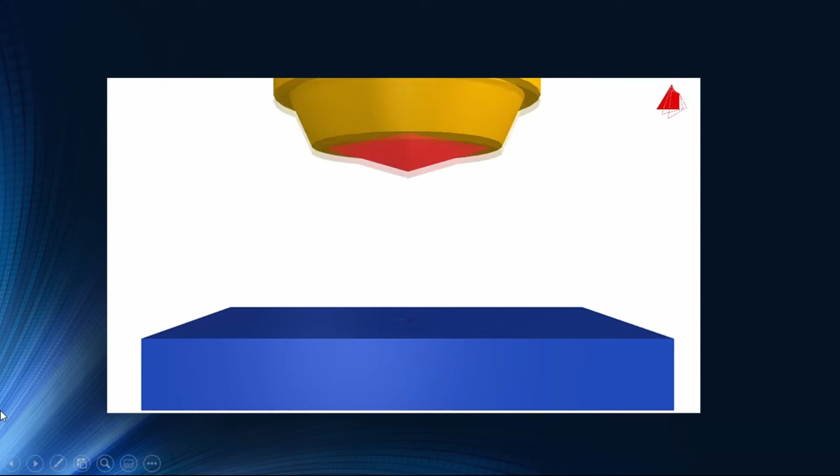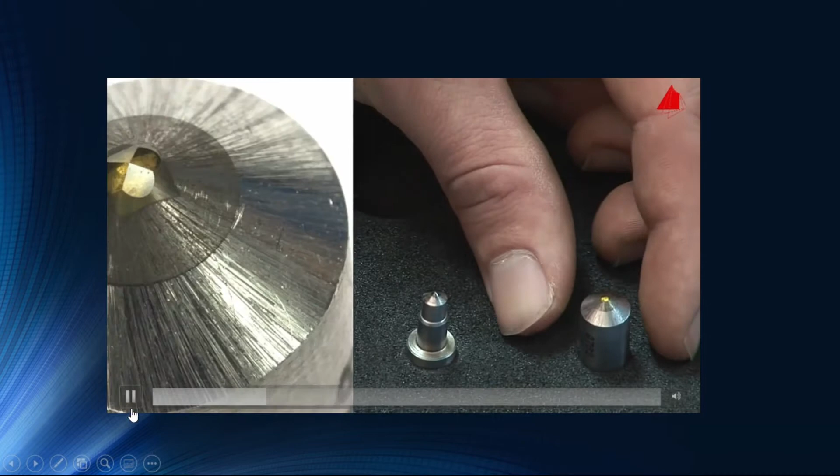O princípio é exatamente o mesmo, só mudando a forma do penetrador. First, the tester has to prepare his testing machine. He takes the Vickers indenter with the four-sided pyramid - então vai pegar o indentador e colocar na máquina - e insere no dispositivo de montagem da máquina de ensaio.

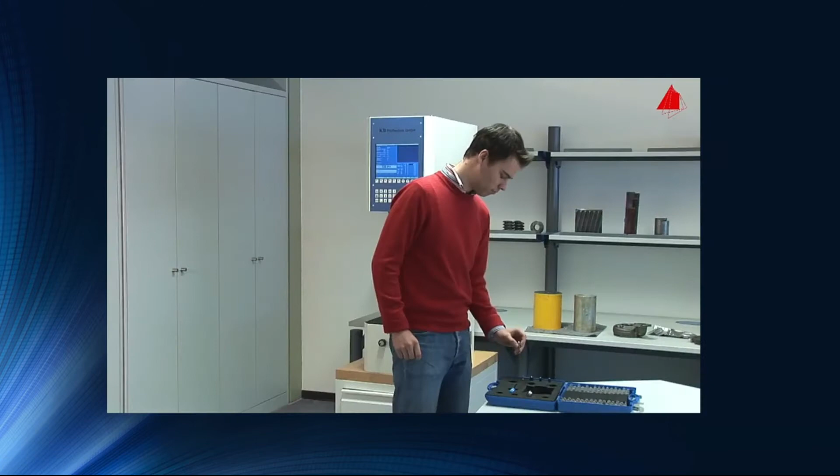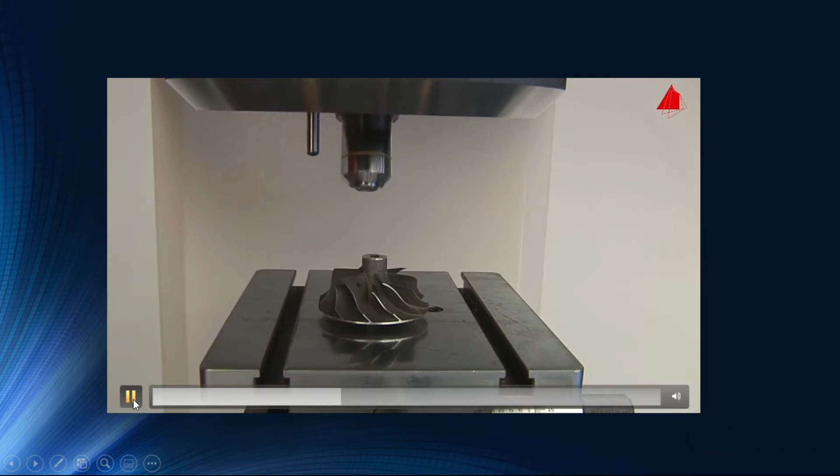He then places the compressor wheel on the support table and rotates the microscope lens into its working position. Da mesma forma, ajustando o foco do microscópio. With a hand wheel, he adjusts the height of the support table until the test piece surface is displayed in focus on the screen. Next, he moves the test piece around on the support table until the right spot for the hardness test is displayed.

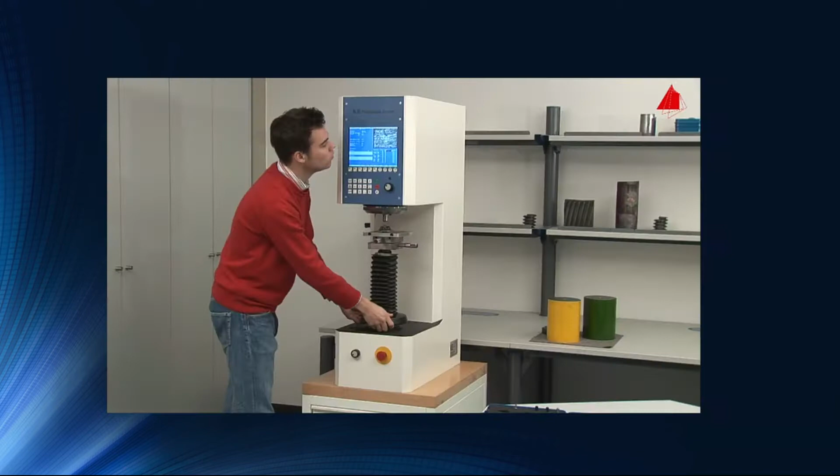Now that everything has been prepared, let's begin with the test. After pushing the start button, the diamond pyramid pans down and carefully touches the test piece surface. The test force slowly increases to its specified value. Então a aplicação da força começa digamos do zero e vai até o valor máximo setado no teste, e aí tem a marcação ou a impressão na peça.

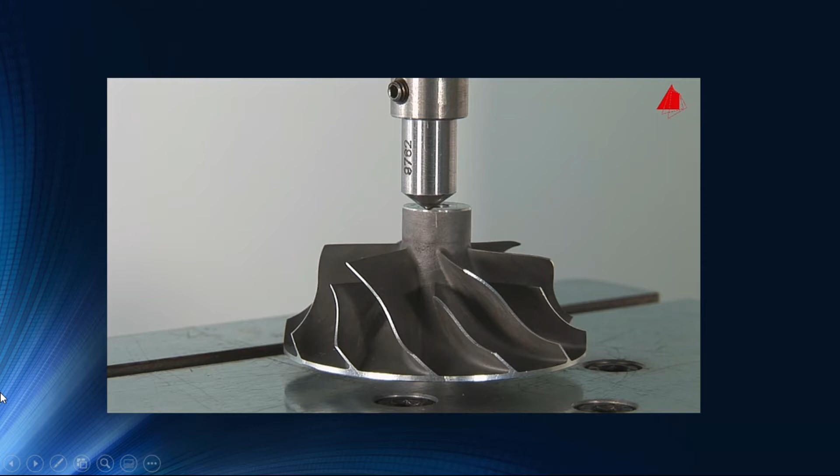After holding the test force constant for a certain time, the indenter lifts again, pans back, and the microscope lens resumes its former position. This is the magnified indentation on the display screen. A indentação está marcada, aí vamos ir com essas linhas retas vermelhas e azuis e definir os valores das diagonais.

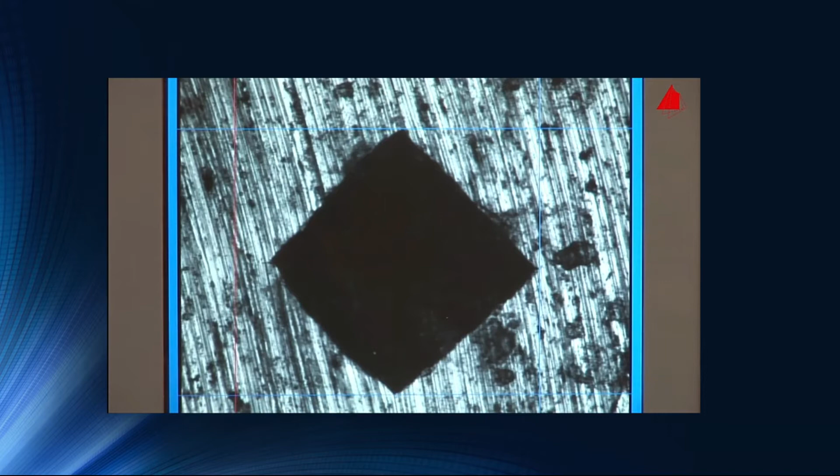With the control knob, the tester now places 4 measuring lines at the corners of the indentation. Doing that, he can easily measure the length of the 2 diagonals. Feito isso, a fórmula já está colocada dentro do equipamento, então aperta-se um botão e tem-se o valor da dureza - he only has to push the input key.

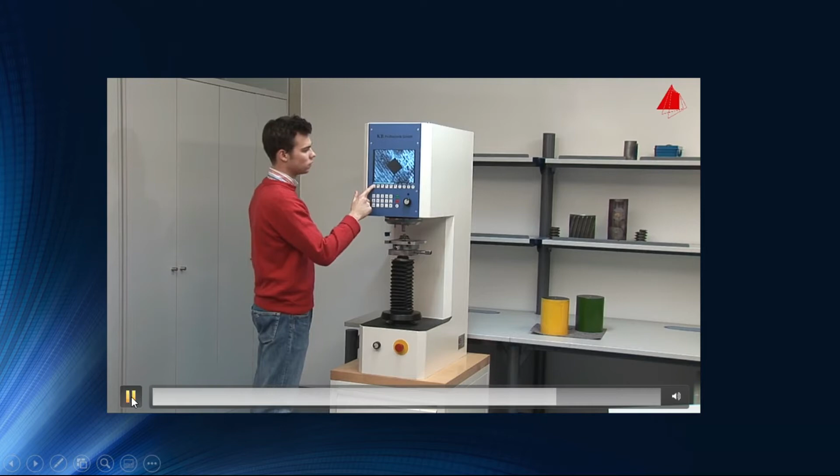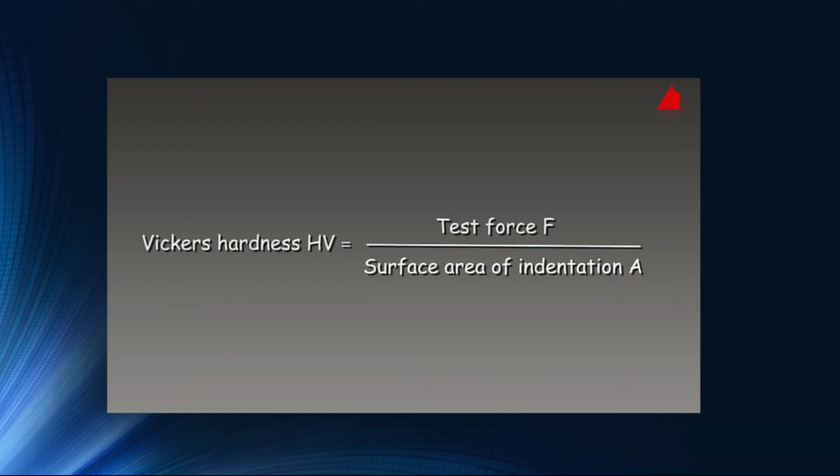The Vickers hardness value will then be calculated automatically. It is equal to the test force F in the old unit kilopond divided by the area of the indentation A in square millimeters. The Vickers hardness of our compressor wheel is displayed on the bottom left-hand corner of the screen. In this case, it amounts to 125 HV.

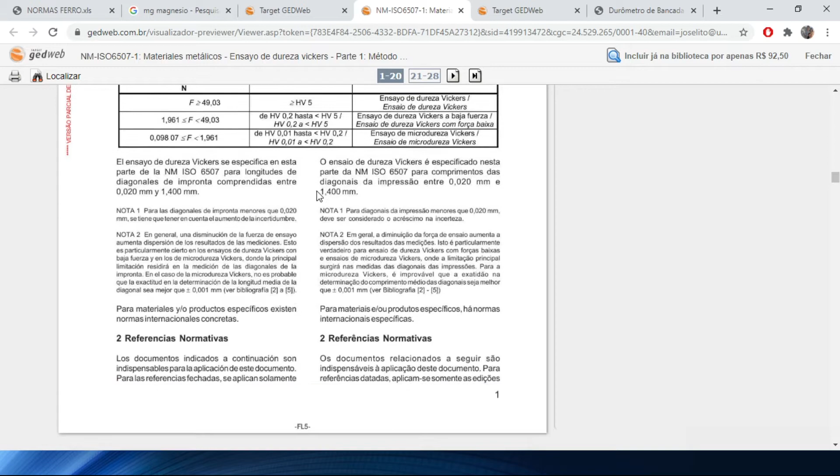Da mesma forma que para o ensaio Brinell, nós temos para a dureza Vickers a norma relacionando ou dizendo qual é o procedimento do ensaio. Então tem o escopo, referências normativas, símbolos, termos e aí vai. Fala da máquina de ensaio, como deve ser o método, as forças a serem utilizadas, os símbolos utilizados, o princípio, a aplicação da força, esse ângulo aqui que é de 136 graus, a definição das diagonais, as contas que são feitas e como deve ser colocado o valor.

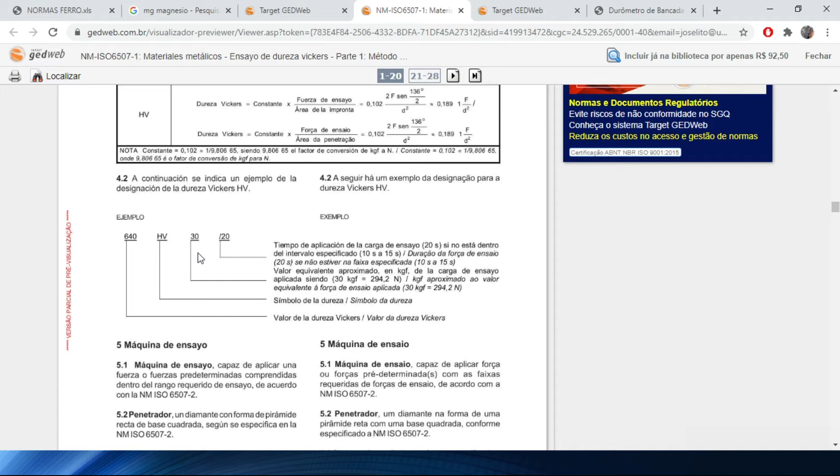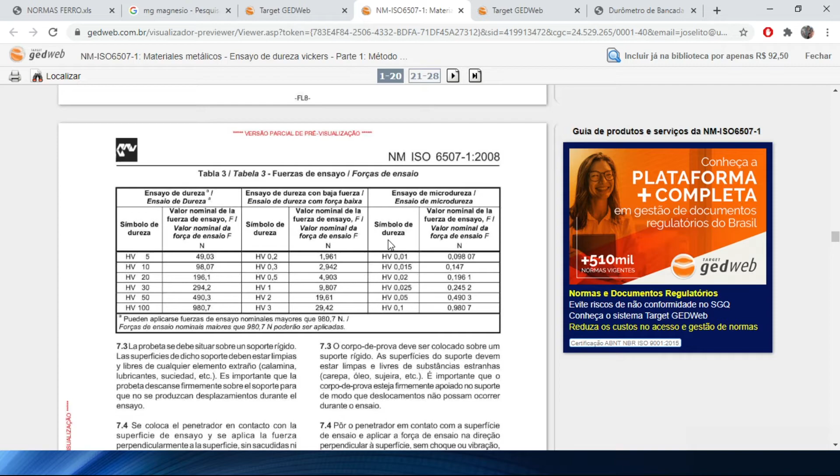Então aqui 640 HV 30/20. Então 640 é o valor, HV dureza Vickers, 30 a carga máxima que está sendo utilizada e o barra o tempo em segundos. E aí tem todas as normativas. Então, nós temos aqui as escalas HV5, HV10, HV20, HV30, HV50, HV100, e aqui os valores que são colocados para cada um desses. E lá para o final vem a questão da incerteza dos resultados, aí fala um pouquinho da estatística e das correções que devem ser feitas, principalmente quando se trabalha com peças com espessuras muito pequenas.

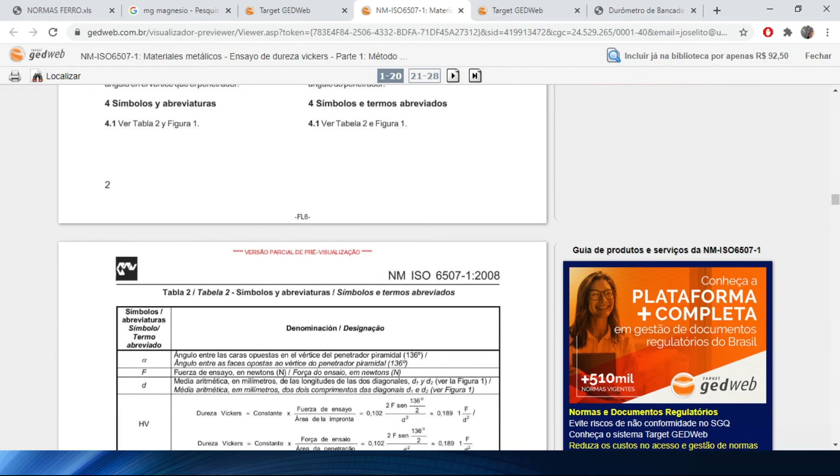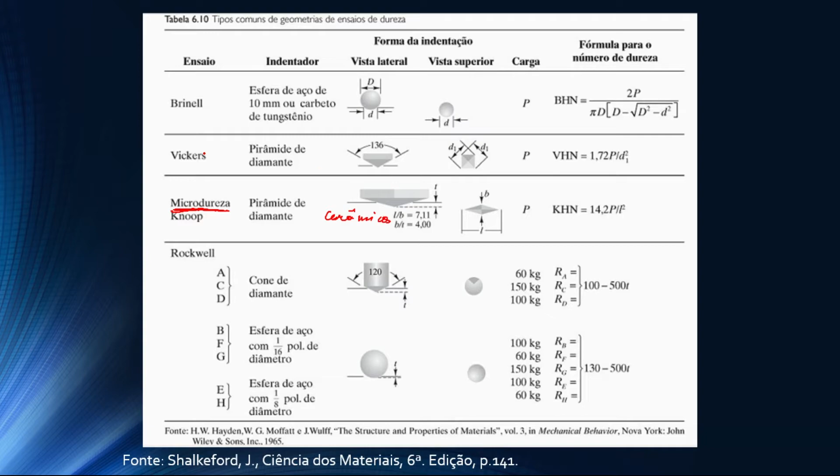A dureza Knoop, ela é similar a Vickers, só que é microdureza, é muito mais aplicado a elementos de pequena espessura e que tem uma fragilidade relativamente grande, por exemplo, como os materiais cerâmicos. Mas o princípio é exatamente o mesmo da dureza Vickers.

Falando agora da dureza Rockwell. A dureza Rockwell, ela é, digamos, um tanto quanto mais simples de utilização, pelo fato de que a medida da dureza é feita diretamente em uma escala. Então, tem-se o equipamento chamado de durômetro, e desse durômetro nós vamos ter escalas A, B, C, D, E, F, G, H e K. E cada uma dessas escalas vamos ter um indentador, ou seja, um penetrador, que é feito de um tipo de material.

Além disso, ainda temos as escalas 15N, 30N, 45N, 15T, 30T, 45T, 15W, 30W, 45W, que vai depender do tipo de penetrador e da força que está sendo aplicada. Então, do ponto de vista de utilização na indústria metalmecânica, a Rockwell tem uma facilidade bem maior porque um único equipamento já dá o resultado.

E qual é a vantagem da Rockwell em relação à Brinell? Na Rockwell não se precisa de um equipamento adicional, então basicamente a medida vai ser pela profundidade que o indentador penetra na peça. Então, se ele penetra muito, uma dureza pequena. Se penetra pouco, uma dureza alta, tudo isso vendo em uma escala.

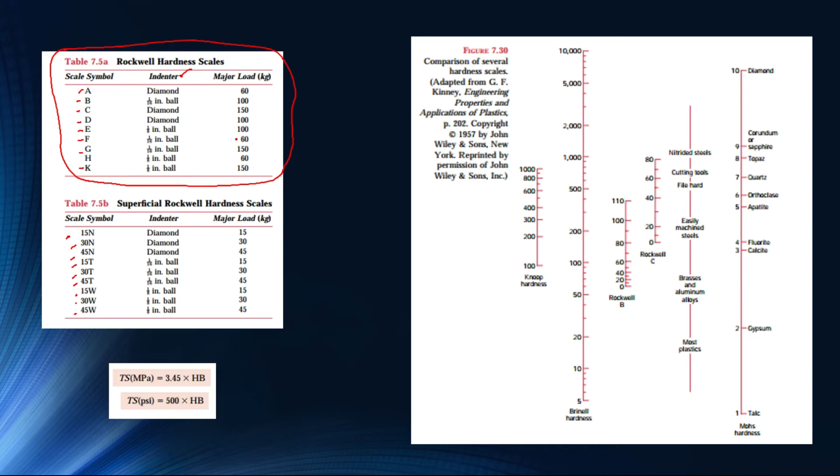Vamos utilizar de novo o mesmo canal para falar sobre a dureza Rockwell. No caso aqui, utilizando a escala C.

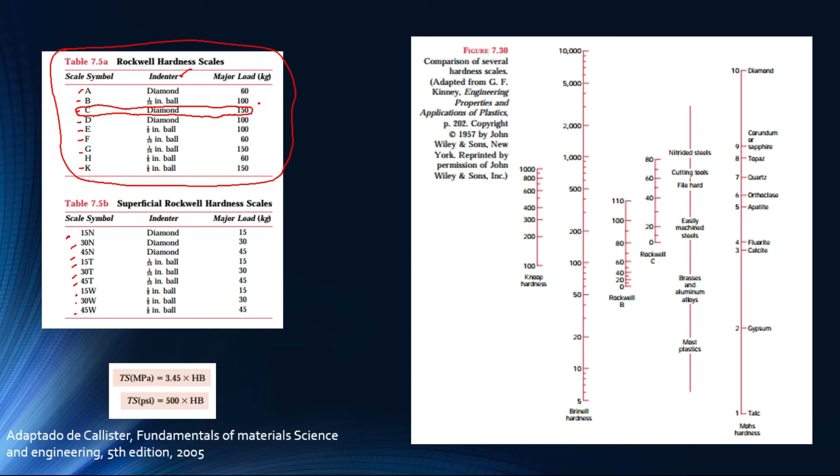Rockwell é com um penetrador, é essa daqui. Um penetrador de diamante e uma carga de 150 kg.

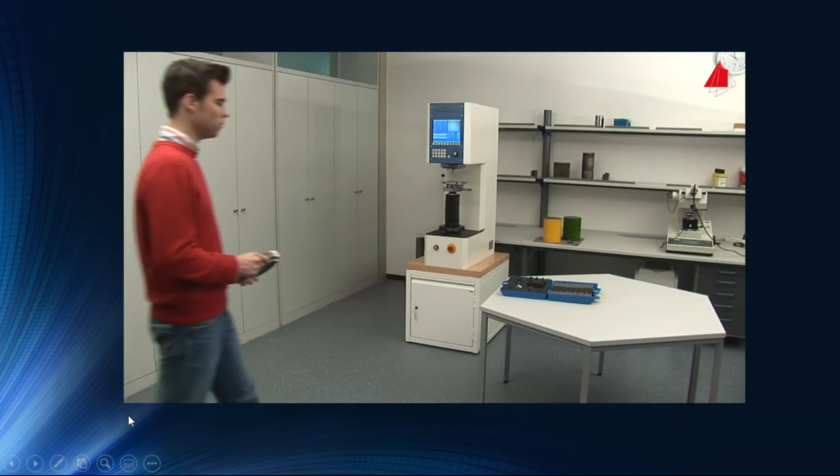The Rockwell Hardness Test, Scale C. In this video, we will show how the Rockwell Hardness Test works using a gear wheel. The basic idea of this test method is to measure the permanent depth of indentation of a hard indenter under a test force. In the process variant Scale C, a rounded...

Então, o penetrador, a peça que está sendo ensaiada, e a gente vai ver aí a diferença que tem do quanto penetra na peça. Cone made of diamond is used as an indenter.

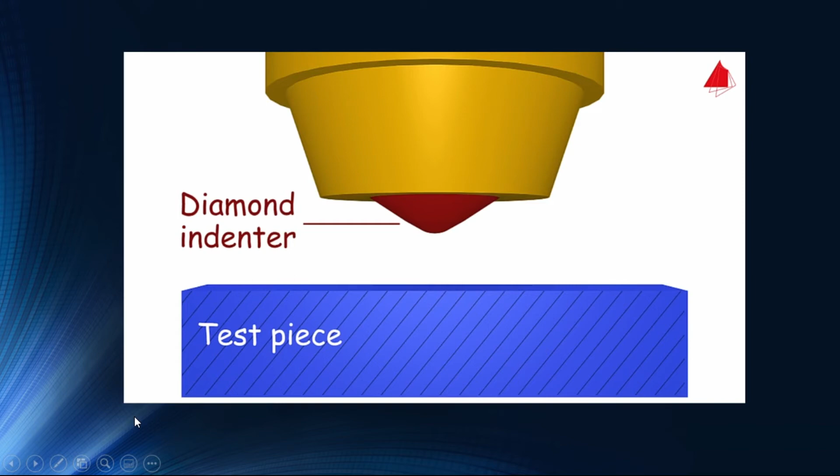In step 1, the diamond cone is pressed onto the test piece surface with a minor force of 10 kiloponds. The depth of indentation under this preliminary load is the reference point.

In step 2, the test force is increased by 140 kiloponds, which is acting as the major force. Depois, acrescenta-se mais uma carga àquela primeira carga que já estava sendo aplicada. This means that an overall force of 150 kiloponds is now acting on the indenter, and this force is held for a certain time.

Deixa durante um certo tempo. In step 3, the major force is removed again. While the minor force is still acting, the permanent... Remove-se a segunda força e vai ali para o ponto 3.

An increase in depth of indentation E is measured. Então, essa diferença entre a aplicação da primeira força e depois da retirada da segunda força, tem-se o que a gente vai medir como sendo dureza.

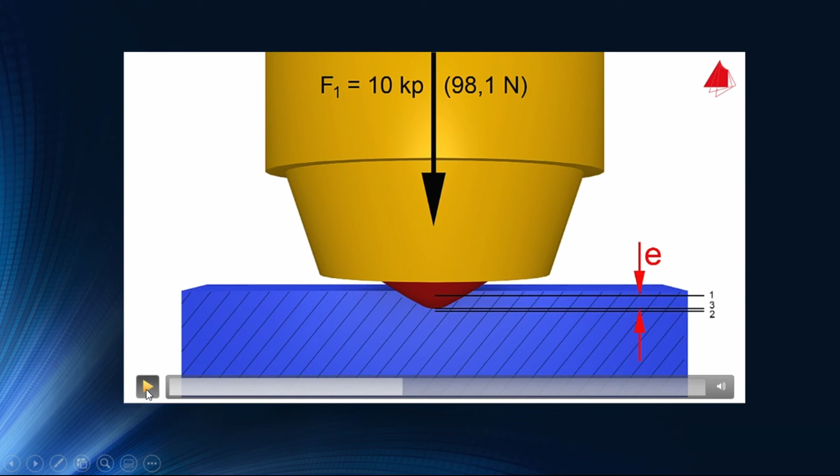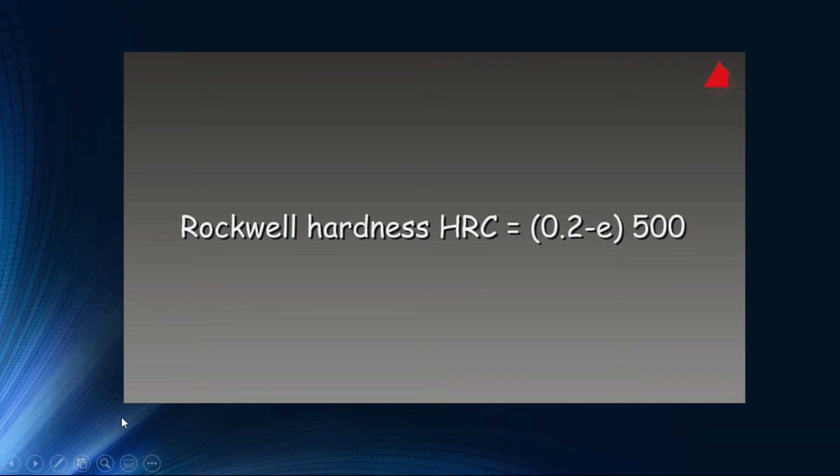This is how the Rockwell hardness is calculated. Rockwell hardness HRC is equal to 0.2 minus permanent depth of indentation E in millimeters, times 500.

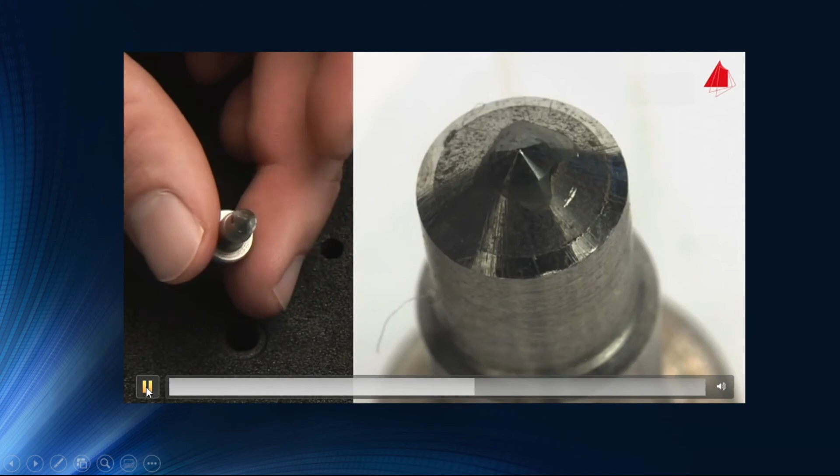Let's take a look at how the test is carried out in practice. The tester selects the conical diamond indenter and installs it in the testing machine. Then he picks up the gear wheel and puts it on the support table.

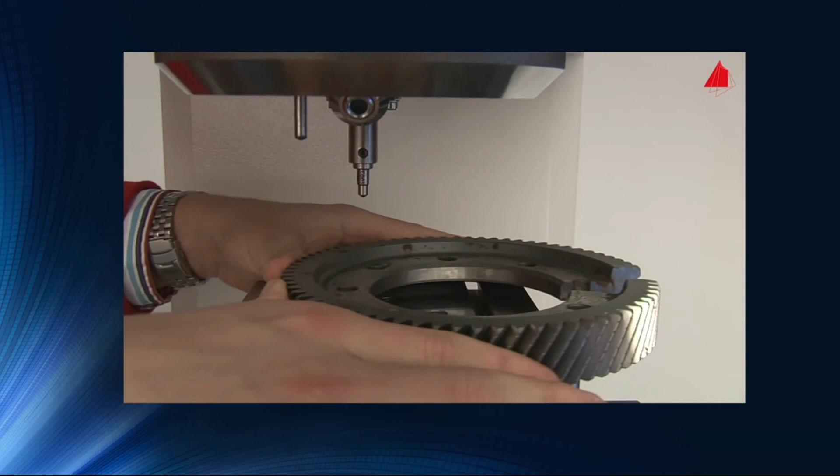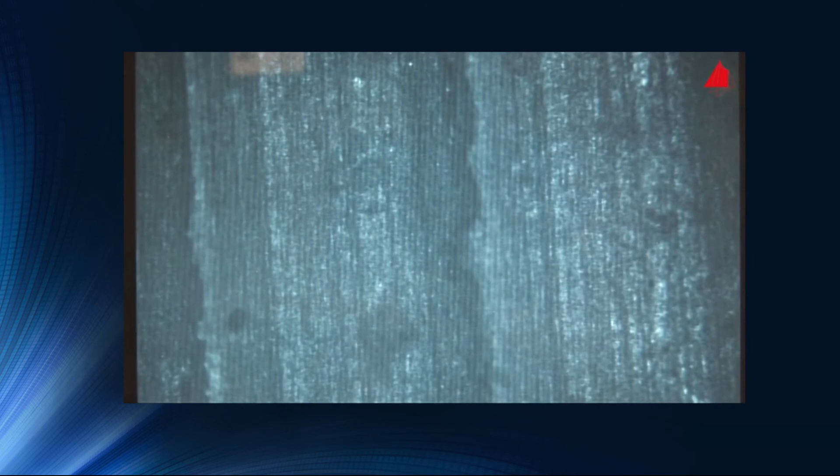In modern testing machines, the Rockwell hardness test is fully automated. That's why the Rockwell hardness test is used so often in automated production lines.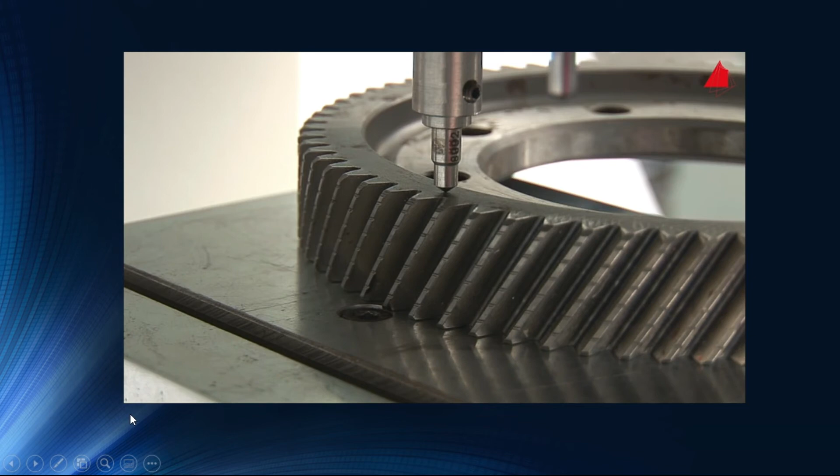That's it. Então, fez todo o ensaio e já saiu o resultado. The Rockwell hardness of our gear wheel is 55 HRC. This result is displayed on the screen.

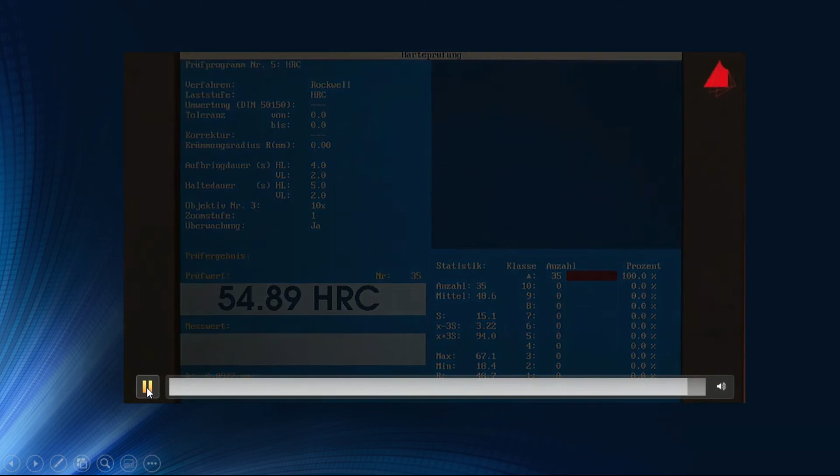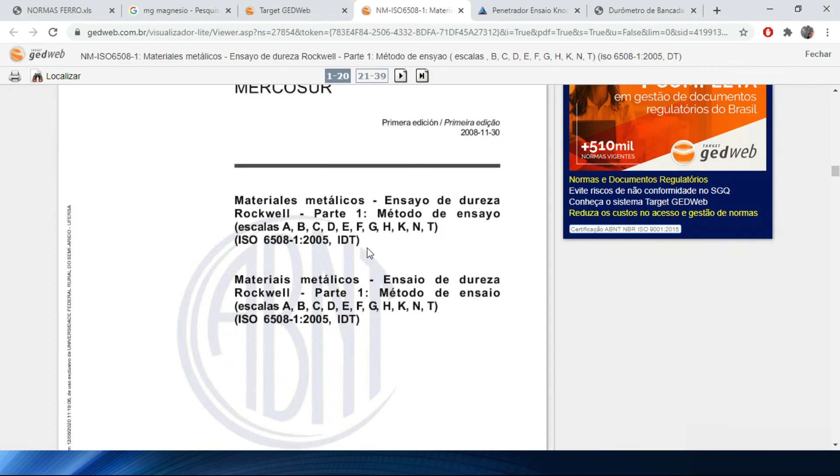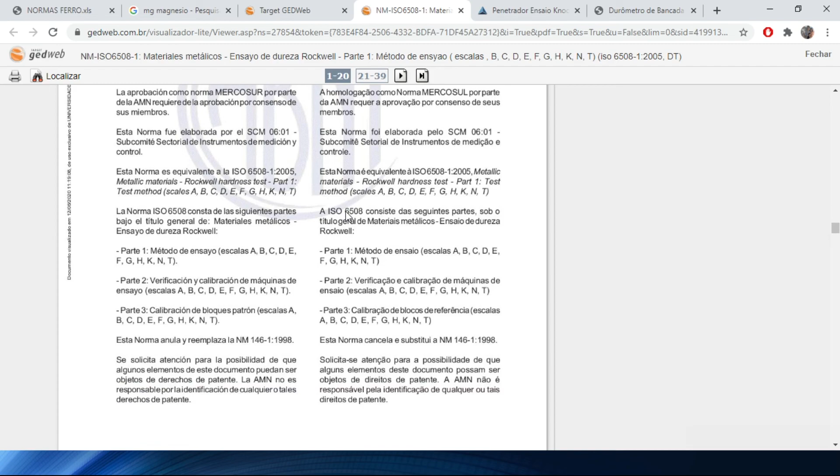E tal qual as normas de dureza Brinell e Vickers, também tem norma para Rockwell, que é as escalas A, B, C, D, E, até T. Então vai dizer o escopo, a referência, a máquina, o corpo de prova, o procedimento, então tudo vai estar determinado na norma. Inclusive, deixa eu ver se encontra aqui.

Que as escalas, aqui o símbolo, então se eu estou usando a escala A, então vou colocar HRA, aí vou usar um cone diamante, a força inicial 98 newtons, a força do ensaio adicional 490 newtons e a força total 588 newtons.

Então aqui eu vou ter campo de aplicação que vai de 20 Rockwell A a 88 Rockwell A. E aí vai para cada uma, vai tendo os valores.

Então aqui a escala 15N. Então vou usar Rockwell HR 15N, que quer dizer que é com cone de diamante, e aqui as cargas que estão sendo aplicadas. Então para cada escala usa-se um tipo de penetrador diferente e uma carga ou cargas diferentes.

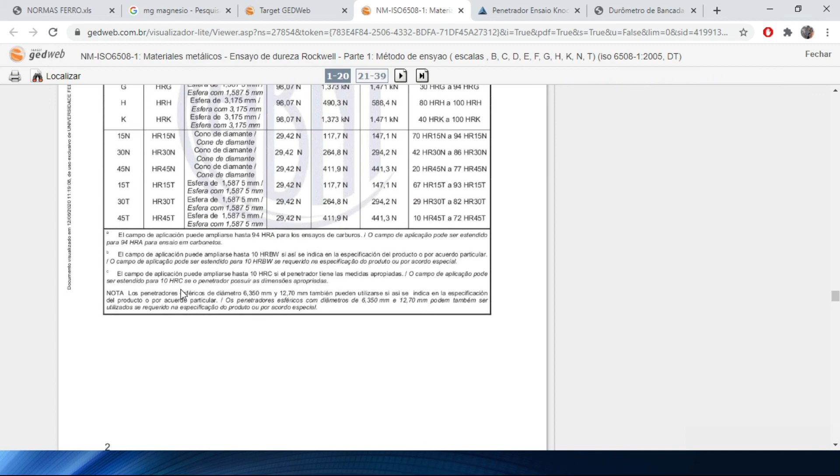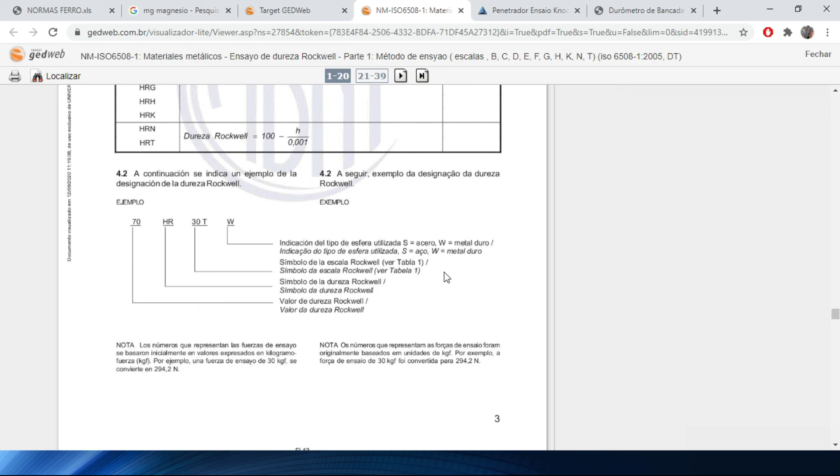Aí vem explicando aqui como é feito o cálculo dos ensaios e como deve ser escrito a dureza. Então 70, o valor da dureza, HR, o tipo da dureza, 30T, que é o símbolo da escala, e o W, que quer dizer que é um penetrador de tungstênio. Então seria essa escala aqui, 30T.

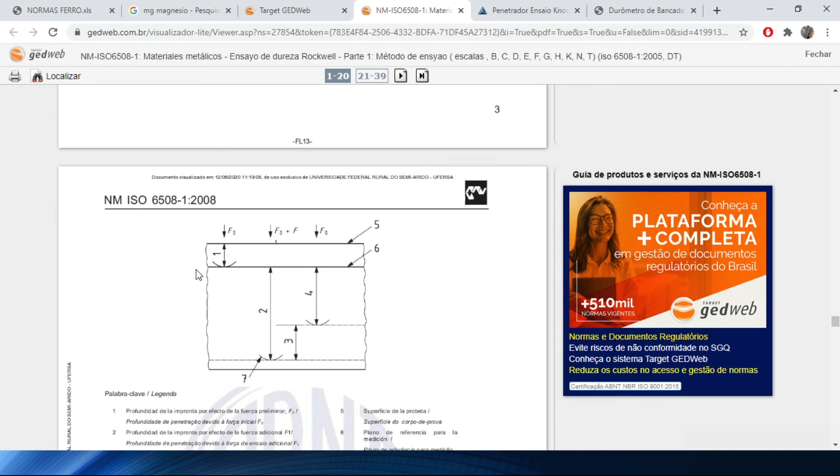Então para cada um é definida aí a norma aqui mostrando como é a aplicação, onde vai as continhas. Então a norma diz como tudo deve ser realizado.